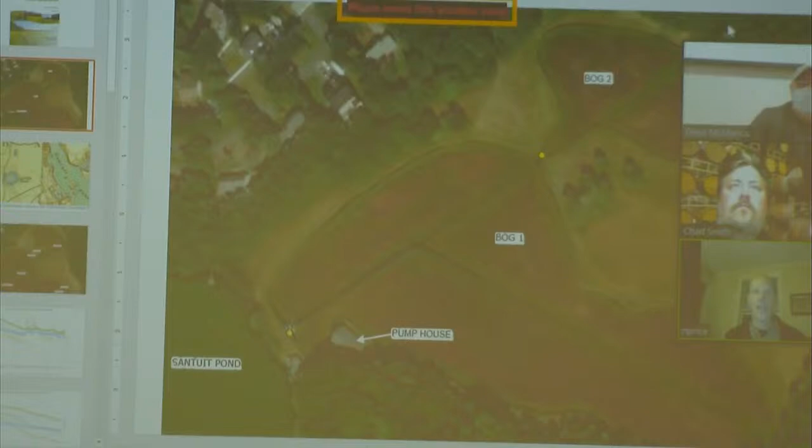You guys obviously know where this is, right off the Santuit Pond. Two bog cells, one larger than the other. Pump house and an old screening house there. Two culverts connecting one to the pond and the two bogs together.

Looking at some old pictures, the left is the 1893 USGS map with no bog shown, and the right is 1941 where the bogs are present, telling us that the bogs were built sometime between 1893 and 1941. I heard today from Caitlin that Mark Robinson from the Cape Cod Compact had looked up some deeds and thought that they were built like, I believe, 1903 perhaps. So we had been thinking they were like 80 years old, but apparently they're more like 120 years old. So they've been there for some time.

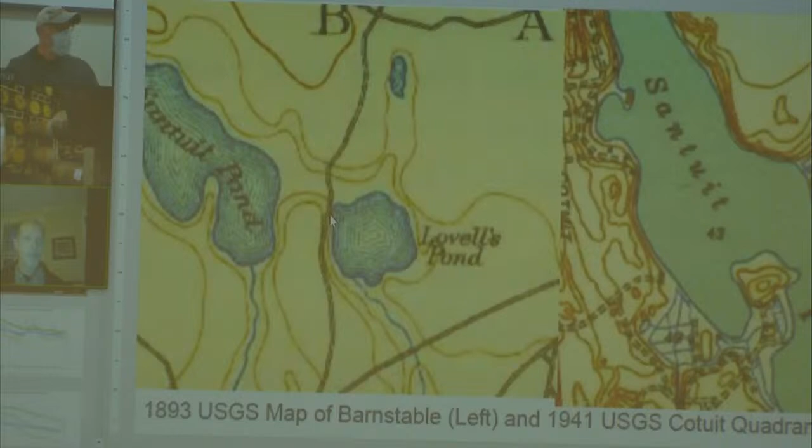This project is a feasibility study to figure out how doable it would be to restore these bogs to wetlands that were there before. What might be the right approach, and how much it might cost.

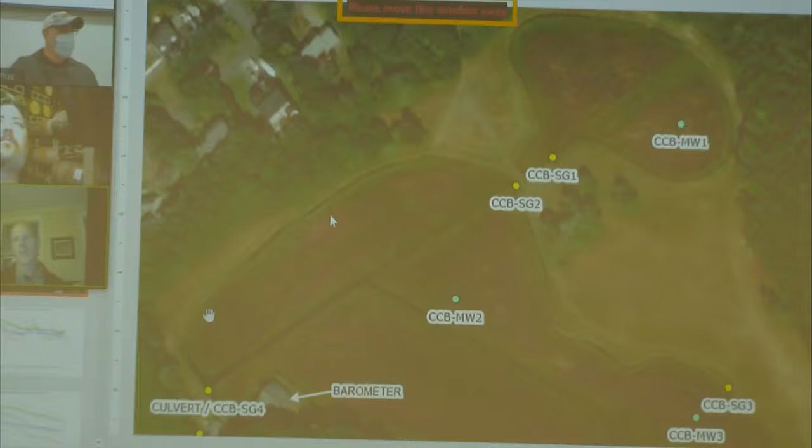And really, whenever you're looking at cranberry bog restoration, the primary considerations are how much sand is on the top, where is the peat, how thick is it, and what's the groundwater like. Because you obviously need to get the bog surface down close enough to the water table to provide wetland hydrology. And the issue with cranberry bogs is over, in this case, 100 plus years of adding sand periodically to them, the surface elevation has been raised well above the water table. So you need to get down to close to that water table elevation to support wetland hydrology. And how far you have to go dictates how much it costs to remove that material.

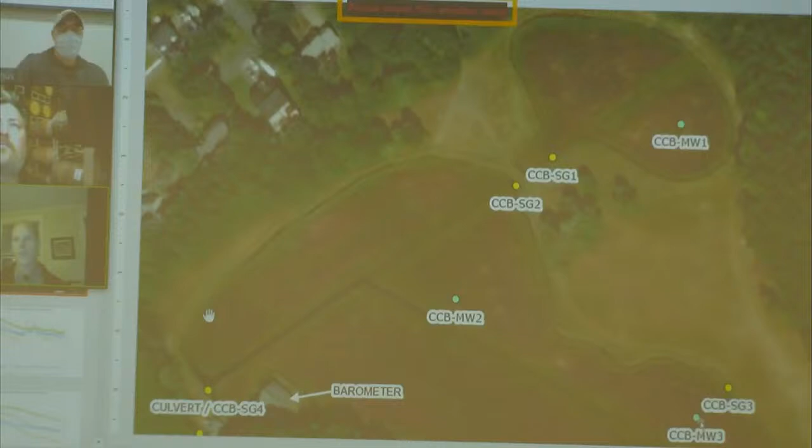So we'll start with the water level gathering. We installed 3 wells, labeled 1, 2, and 3 on this figure. Can everyone see my cursor, by the way? Yes, okay, great. And also out here in the pond, another stilling well. So those 4 spots, the 3 wells and the pond, had automated water level data loggers installed in them. So we're collecting data on a 1-hour interval in those, so we get very accurate long-term high-frequency data from those.

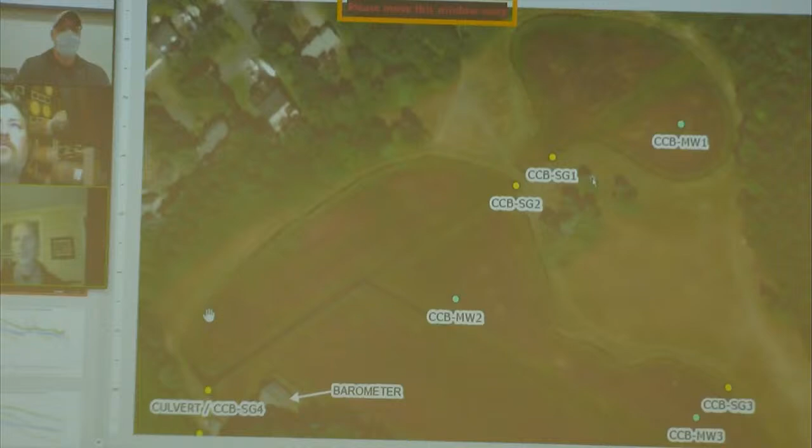We also put in 4 staff gauges in the ditches in the bogs, and those did not have data loggers. So those only had 3 distinct measurements when we were out in the field at them.

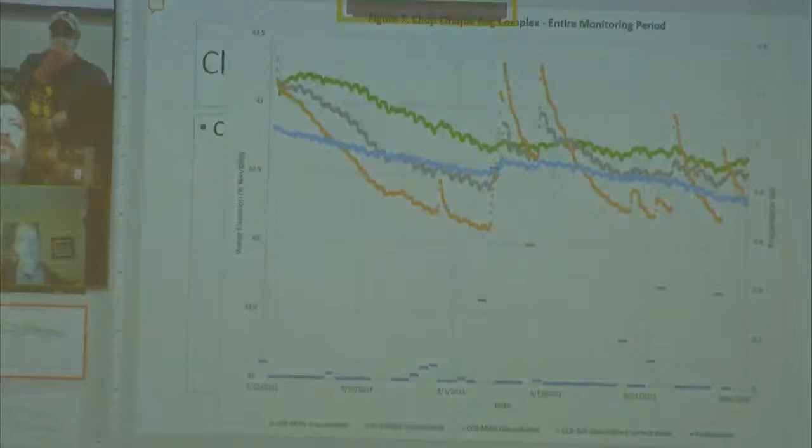This graph is showing the water levels from the 3 wells and the pond logger, so the 4 places with the fast data loggers in them, showing how water levels fluctuated over the study period from July 12th through August 31st. There's a few interesting things here.

First off, it was very dry at the beginning of the period. There were about 2 weeks where it hardly rained at all, and over that time period you can see the water levels falling in each of the wells and also falling in the pond, but falling faster in the wells.

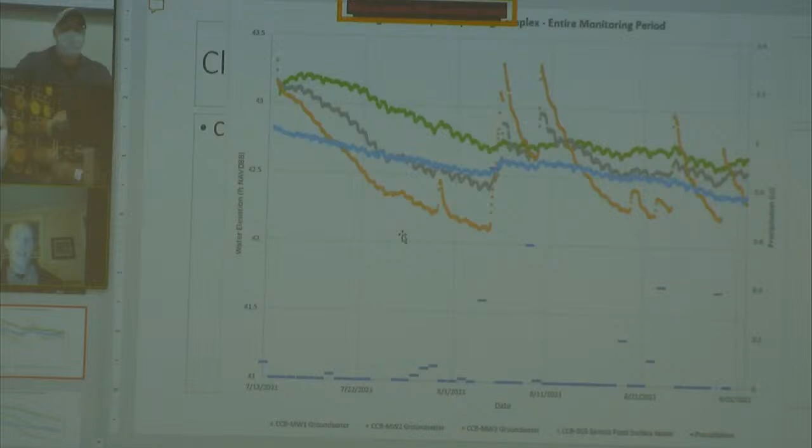I believe that's due to the fact that all of the vegetation in those bogs, the wetland vegetation, is actively transpiring water from the ground to the atmosphere. So that combination of evaporation and transpiration in the bogs is a greater loss than the sole loss from evaporation in the pond. Thus you have a faster decline.

This is consistent with standard water budget thinking for how groundwater recharge occurs. So wetlands generally have zero groundwater recharge, whereas ponds do have a small amount of recharge. So this trend makes sense with that general thinking.

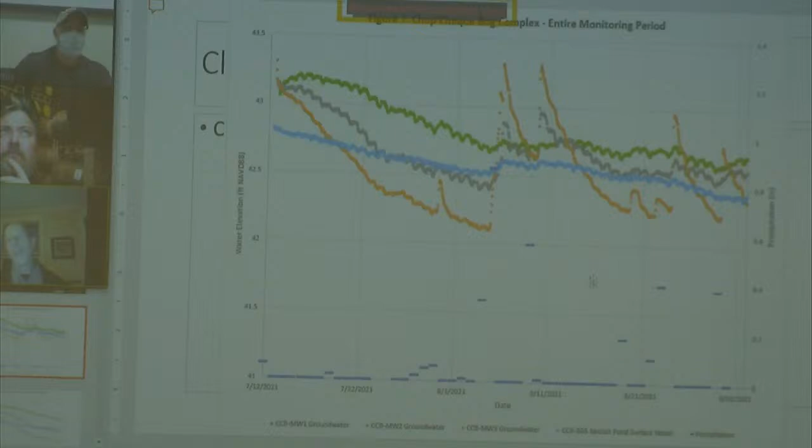Then things get interesting when it starts to rain. Each of these little blue dashes is a rain event, and the right axis gets used for looking at the precip. This was really one storm, but it crossed over the midnight time barrier, so it shows up as 2 separate items here.

You combine this, 0.8 something and 0.3 something together, and you end up with about 1.2 inches of rain in that storm. That kind of barely bumped the pond, probably by about 1.2 inches, or perhaps a little bit more from runoff coming into it.

Whereas 2, and 1 in particular, of the cranberry bog wells dramatically rose in water level in response to these events. The same thing happens again in response to this rain event, it happens here. In response to this rain event, it happens here.

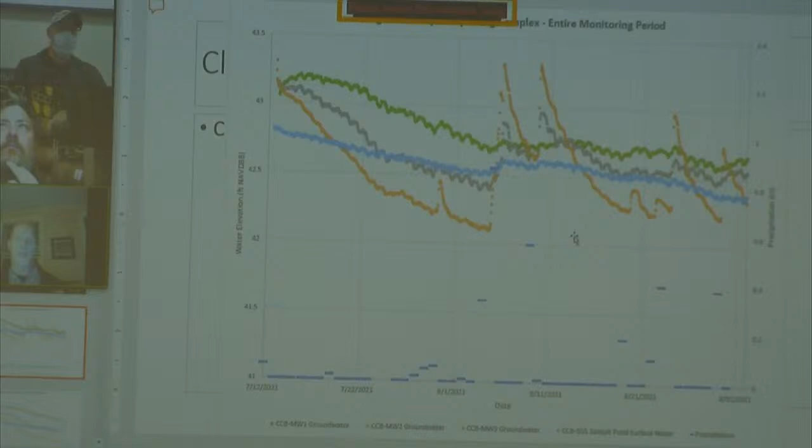So we think what's going on is that rain is hitting the bog surface. They're kind of installed in low spots, so some runoff is going towards the wells. And because of that peat layer where these wells are screened, the water has a real hard time getting out of the well once it gets into it.

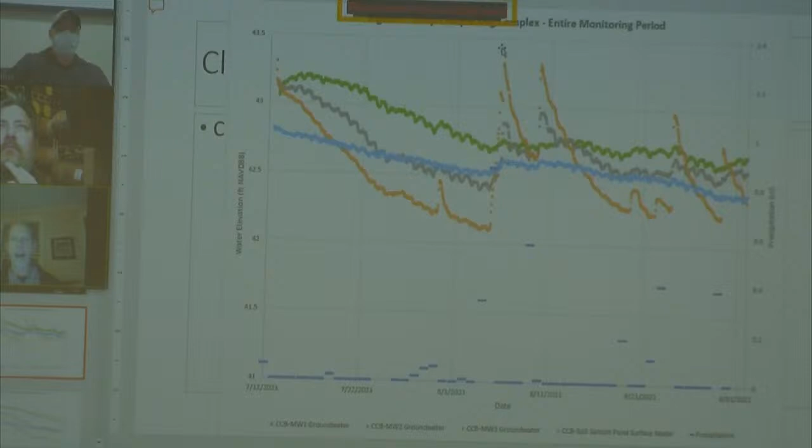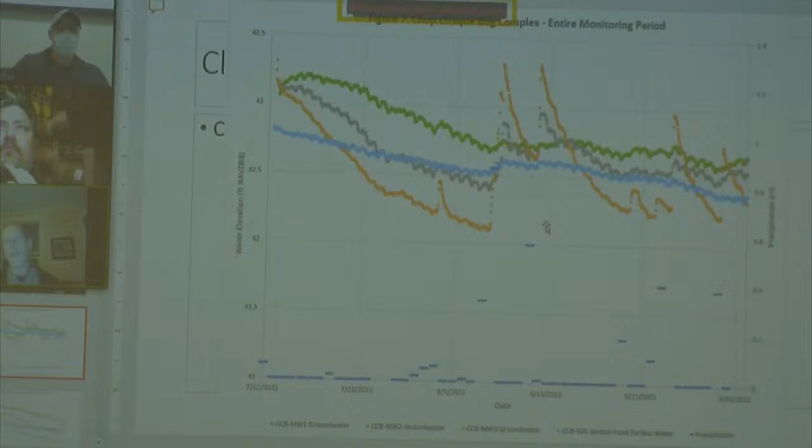So this looks like surface water runoff getting into the well, creating this rise, and then it slowly decays away in the days following the rain event. This makes it a little hard to look at what's probably really going on in the groundwater when it's raining, so we isolated that period in July when it didn't rain to get a better feel for the real groundwater situation, which is shown here.

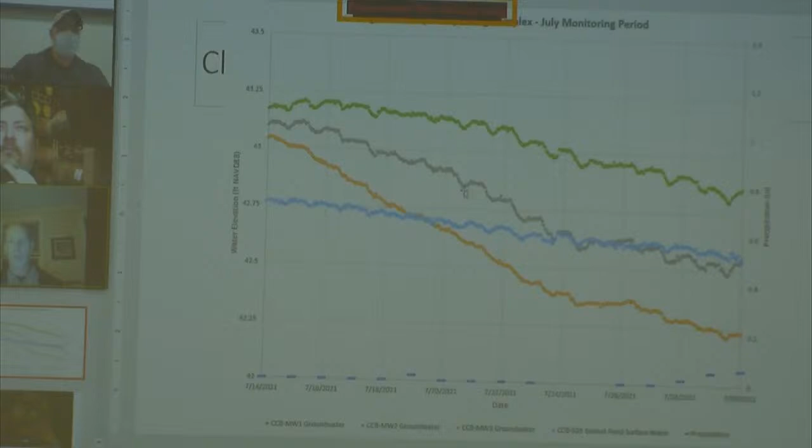Then we picked one of the days that we were out there collecting actual field data, so that we could use not just the automated data loggers but also the staff gauges. We looked at the elevations at that time and mapped a water table contour map for the area.

So you can see the flow from high to low. It's very flat - this is 0.2 of a foot of difference between this contour line and this contour line. So it's really flat, but there is a gradient of flow generally from the northeast to southwest, north-south, northeast, southwest.

And that's consistent - this is the Cape Cod Commission GIS groundwater contours. The 48 is here, don't worry about the values, there might be slightly different datums. The next one up, which was, I believe, the 50, is off the map to the north, but it shows a similar gradient from north to south in the area.

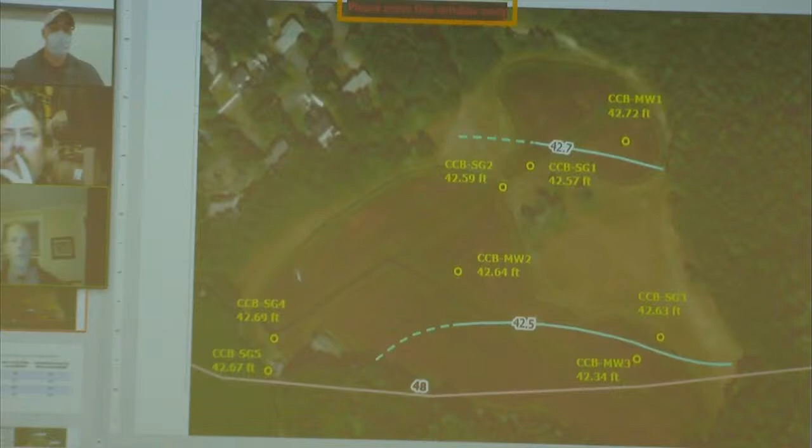So once we had this local scale information on water levels, we then went and compared it to a nearby USGS index well. This is just a little over a mile away, over off of Cotuit Road, kind of near where that rotary is. There's 40 some odd years of water level record from this index well.

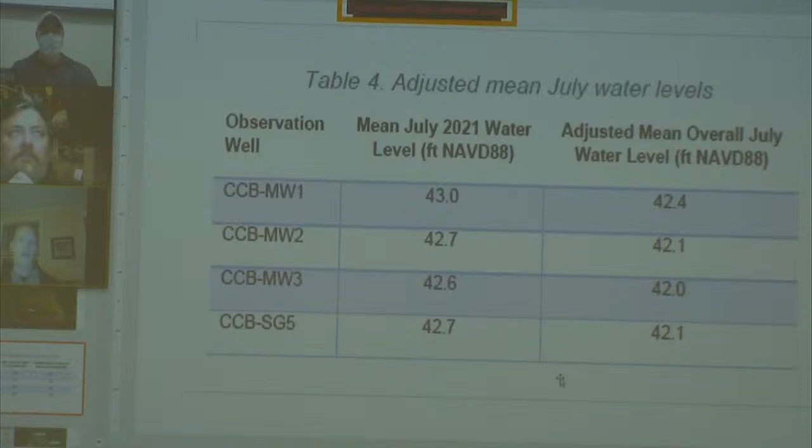By comparing our July monitoring period data from the site to this 40-year record at the index well, we could get a better feel for what we thought the overall long-term average water level conditions were. So that's shown here - it was a little wetter, water was a little higher this July than probably the long-term average conditions. So these are the adjustments that were made to compute long-term average water level conditions in the bogs for the purposes of figuring out where we need to get at for getting the surface down near the water table.

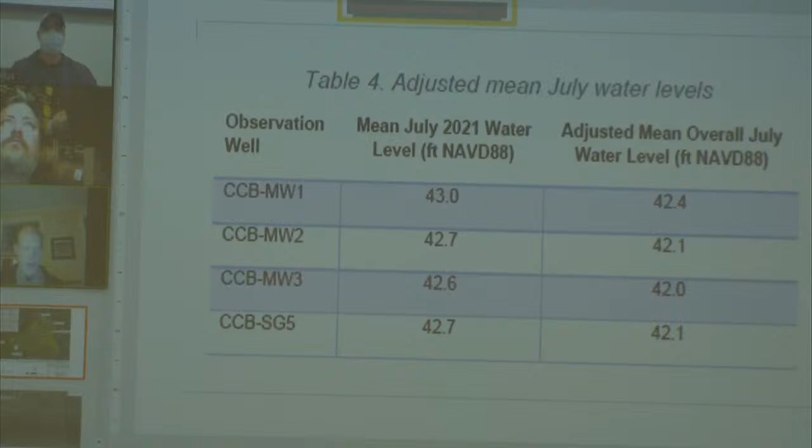Well, before I move on, any questions on the water level stuff? Nope. Okay, great. So we also did a habitat evaluation.

Again, this project was a preliminary conceptual level, basic project. So the habitat evaluation was a quick site visit, walking across in a zigzagging pattern. Our biologist recorded the species that they saw.

And grouped it into these four general communities: naturalizing cranberry bog, shallow emergent marsh, which is essentially the ditches, sandplain grassland, which is the upland habitat, and pitch pine oak forest, which occurs in a small island in the middle.

And we have areas for that, and the report documents the individual species that are shown here that are present.

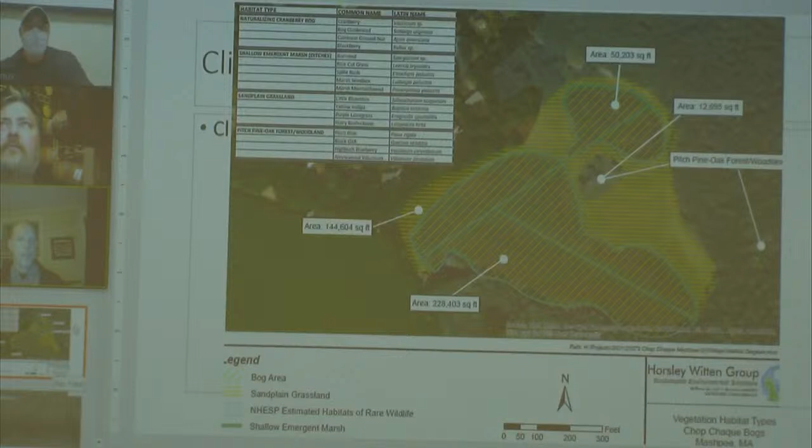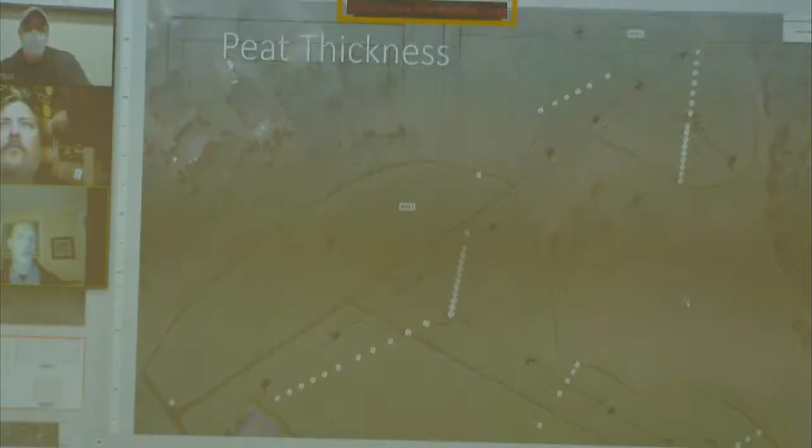So I mentioned that peat was another one of the criteria along with the overlying sand and the water table. So we also did some probings in these transects shown here, where we essentially pushed narrow fiberglass chimney rods, about 1/4 inch diameter, down through the peat until we hit the hard sand underneath it to calculate the thickness of peat.

And this contour map is showing peat thickness, with a 12-foot thickness max here, and this one's about 8, I believe, over on this side.

So this is just showing the peat that obviously developed in the wetlands over thousands of years that those wetlands existed before they were converted to cranberry bogs. So this is just indicating that these bogs were indeed natural wetlands beforehand for a long enough time to build up thick peat deposits.

So if you were able to remove that overlying sand, these bogs should be able to support wetland habitat again, and hopefully there should be a native seed bank present in this peat that will allow native wetland species to propagate once they're back exposed to the air in the right hydrologic setting again.

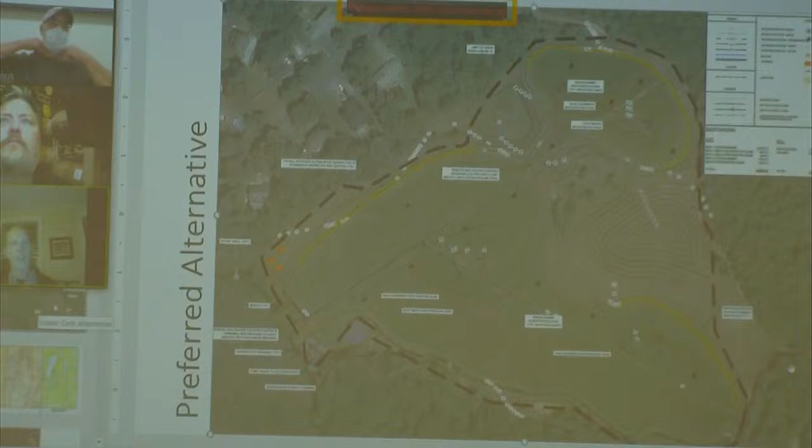The idea here would be to use a methodology that DER has been using recently on other cranberry projects called pluck and chuck, which essentially is having an excavator go out, dig some holes, and then cast the excavated material off to the side in piles within reach, so you don't have to move the material around as much. That reduces cost. The less you're moving stuff, the less it costs.

That's where this comes from, though that pit and mound topography isn't really shown here. The idea is some parts would have holes that were wet, and then there'd be mounds of stuff that would end up being high. The result of that, of course, is the mounds would not be wetland. They would be up above the water table, and the hydrology would not be supportive of wetland vegetation.

So you end up with less area of wetland restoration, less varied wetland types, but the cost of this is likely somewhere in the $300,000 to $500,000 range, getting you down below the threshold of where available funding exists.

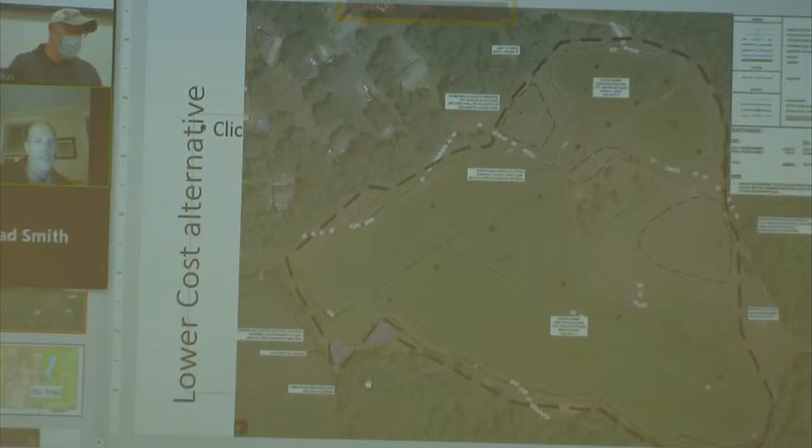So let's move on to the Quashnet. Let me start by offering my apologies to the commission, the same apologies I've given to Drew a couple of times already. We have been slower on this project than I or anyone would like for a lot of reasons, many of the same reasons that we've just been talking about with how the world has gone with the pandemic and staffing, et cetera. But we are doing our best to catch up, and so let me go through where we're at and where we're going on this.

Similar to what I showed for Chag, I like to look at old maps to show how sites have changed over time, as an indicator of how long, for example, cranberry bogs have been here. In the 1890s, this upper Quashnet area is shown as a wetland, with the Quashnet River exiting Johns Pond and heading south. No cranberry bogs present in the 1890s.

Unfortunately there's always a big gap. In New England, the general time frame of available USGS maps is something in the late 1890s and then either the late 1930s or early 1940s, a 30 to 40 year gap of available mapping. That's unfortunate, but that's just reality.

By the time the 1940s come around, all of these bogs have been built. This is the more recent 1990s map where you can see the bogs here. So we're probably talking something in a similar time frame to what we discussed with Chag, probably in the vicinity of 100 years, plus or minus, that those bogs have been in existence.

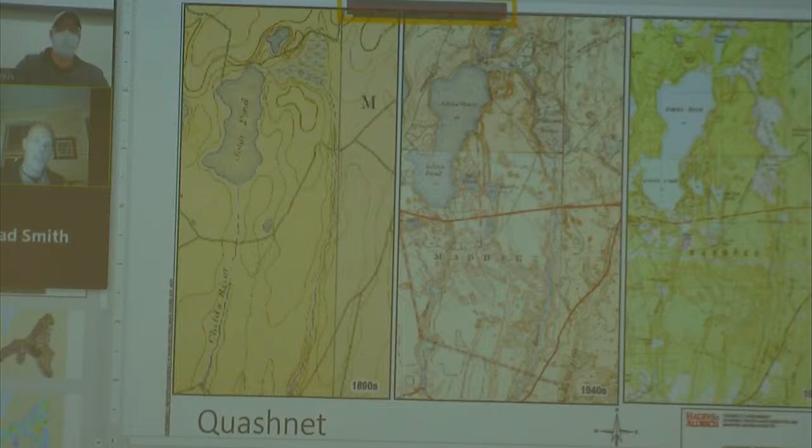Just to refresh people on the site, this triangle of wetland area is now this general triangle of bog area.

This photo is from a good amount of time ago, probably before 2010, when it still looks like cranberry bog. Now, if anyone's been out there, it's rapidly being reclaimed by various habitat types, with a lot of pitch pines and other trees and shrubs going on out there now.

The available funding for this project, and one of the main reasons we're doing this, is that a berm the Air Force built to help separate the river from potential contamination plumes failed, and because of that failure, this money has become available to pursue restoration of these bogs. The reason I mention that is not just because it's a source of funding, but the reason for the failure is the very soft sediments that exist in this central portion of the site.

Trying to walk around and do survey out in this area, as we've done recently, you can easily lose a person if you're not careful. So one of the things we're thinking about in the restoration concept is to not do too much earthwork in this super soft area in the middle of the site, where things don't seem particularly stable. We'll come back to that a bit later.

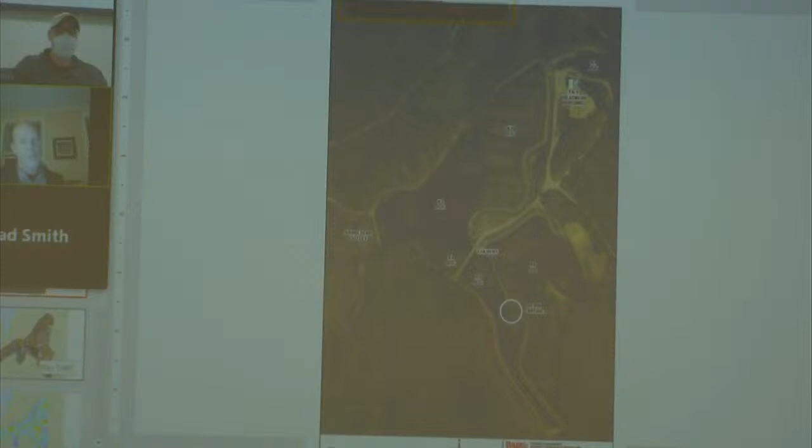Immediately before COVID, one of the first things we did was have the site flown with drones collecting all sorts of really cool information. This picture shows a high resolution visual frequency image of the site, where you can see individual trees, the water, the berms, the roads, and buildings. This was taken in January with a little light snow on the ground, so the sand pits are popping up white, creating a nice relief. We've used this as our base map for a lot of the design thinking going forward.

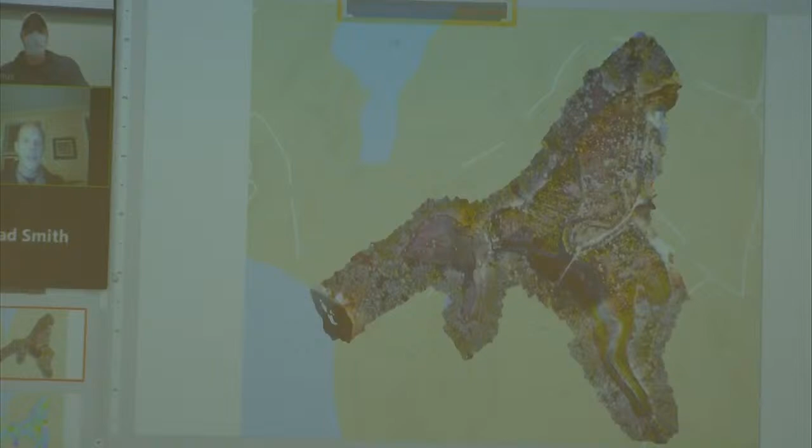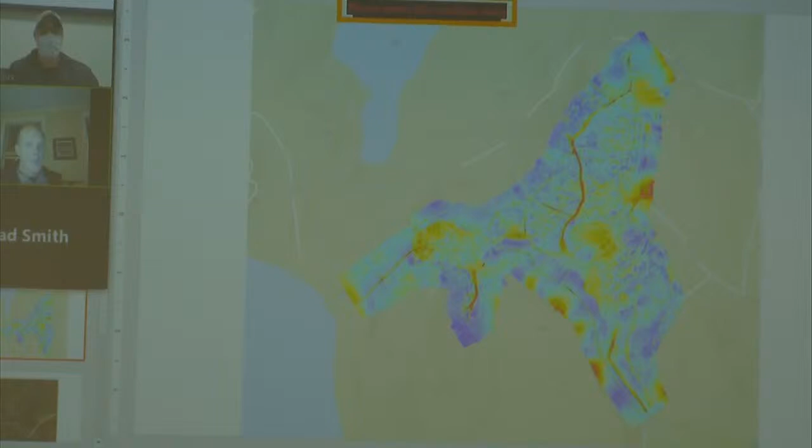Another key element, as I mentioned with Chop Chag, is the peat. The NRCS went out with ground penetrating radar, rather than doing the whole probing process we did by brute force at Chop Chag, to essentially look into the subsurface and map where peat was thick.

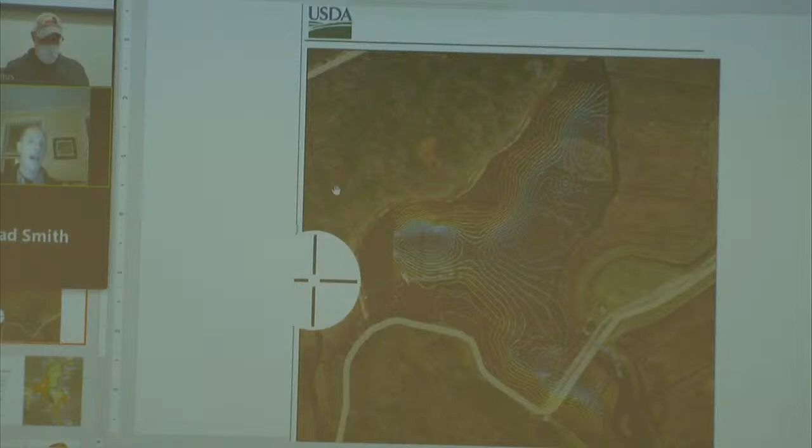You'll see later we're trying to balance being near the peat with not wanting to do a lot of earthwork in the really soft areas. Our current thinking is not to always put the stream straight through the thick peat, but to have the stream nearby and let the thick peat area be restored wetland, as opposed to direct stream channel.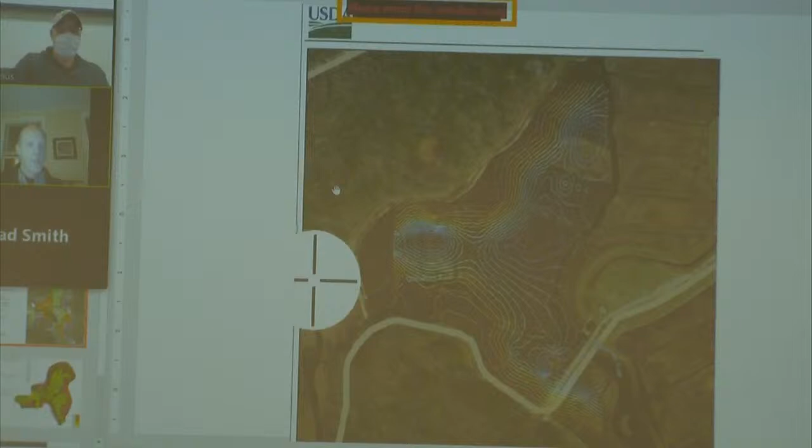This summer we were out—let me back up. I talked about the visual imagery and thermal imagery the drone was able to shoot. The third very cool and important thing was the drone-shot LiDAR topography.

LiDAR stands for light detection and ranging. This has become common practice in about the last dozen years. USGS and other government agencies do it by airplane. In Massachusetts we're fortunate—we're one of the few states with high-resolution LiDAR topography data for the entire coastal area.

This drone-based LiDAR is a bit finer resolution at the site scale because the drone flies much lower than the airplanes used for regional-scale LiDAR mapping. But one shortcoming of LiDAR is that the laser shot down from above, by plane or drone, does not penetrate the water surface. So it does a good job of getting high resolution topography for land, but not a good job showing the bathymetry under the water.

We do need that for restoration design. So we went out a bunch of days this past spring and summer and conducted topographic field survey in the river and in the ditches. We didn't get absolutely every foot of every ditch or river channel, but we got a lot of it—both transects going across and profiles running up and down it.

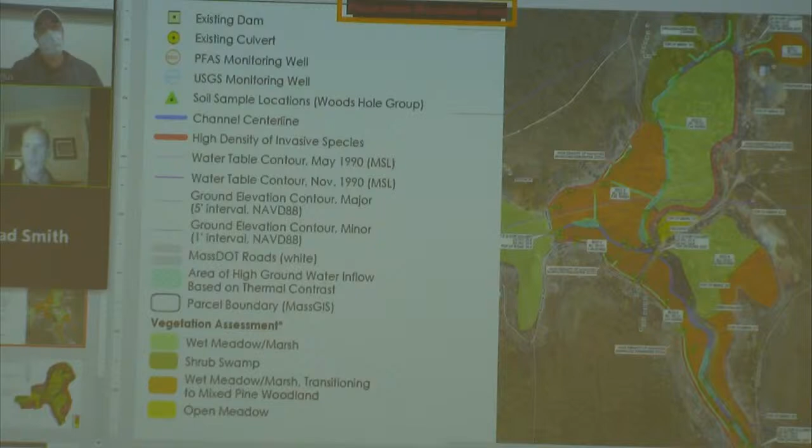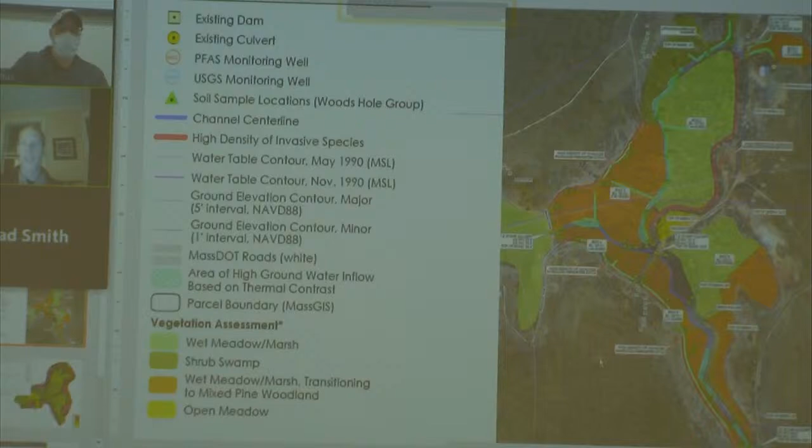We have a list of all the species found. The red shows areas of intensive invasive species presence as observed in the field. That's the culmination of the field base map existing conditions mapping done to date.

So in order to understand and design a river channel, you need to understand the flows, both the velocity and the elevations of the water, which gets done in a model built by the U.S. Army Corps of Engineers called HEC-RAS, essentially a cross-sectional model. Each of these black lines in this plan view are cross-sectional transects that went into the model, made based on our field survey combined with the drone LiDAR survey.

And this is an example of one of those in the model shown here. This is a cross-section across the river, showing the variation of the bog surface on either side, and then the actual river channel in the middle. The blue is where the water is in this particular simulation.

So HECRAS essentially takes whatever hydrology, whether storm events or certain exceedance durations, and sends it from one cross-section to the next. The height and velocity of the water experienced at any transect is dictated by the cross-sectional geometry that water is being forced to go through. So you can use this to predict how high the water will be at a certain spot under a certain condition, and how fast it will be flowing.

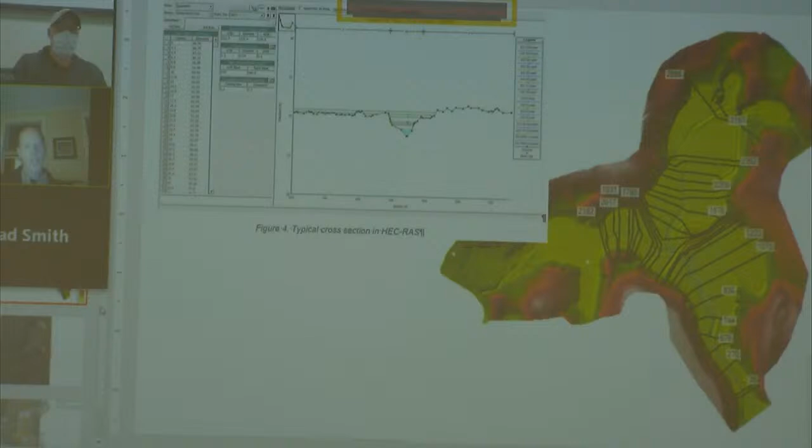This is a rough back-of-the-napkin sketch, close enough to a napkin, of what he and I were thinking about for potential restoration design options before any of the work I just went through. It shows two branches of the river coming together, keeping the main flow and the work away from the soft area, using this cold water area—which we didn't know at the time was cold, but now know is cold—in the shade posed by this high hillside, to put the main river channel along. The black is trying to limit the earthwork to keep costs down for the main area.

We might be rethinking that depending on money and all that, but trying to take advantage of those peat deposits, we might want to expand that somewhat.

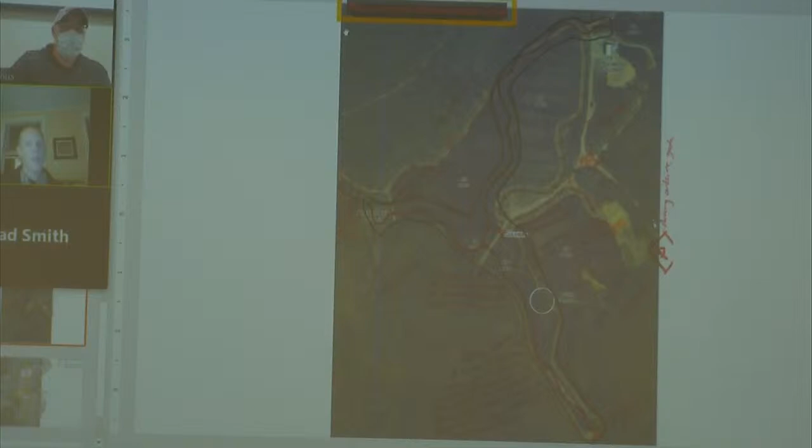I'm just showing this because it's interesting that this is our working concept design in a much better looking image that takes all of the data we've gathered, the base mapping, and the modeling done to date, to show a preliminary concept of how this restoration might work.

In this case, we've actually done some math to compute the meander bends for the hydrology and topography of the site, and placed them trying to minimize the amount of work that needs to be done, trying to utilize those existing channels that have cold water and aren't terribly overly straightened, and then only deviate from those where it looks necessary to either get into cold water or to avoid doing work in really wet, soft material.

So the green is the existing stream system, and the black is the draft conceptual proposed stream system—similar, but with some slight movements. Yellow are the existing berms. This brown shaded area represents areas of the thickest peat shown from the ground penetrating radar, with the idea being to target those for primary wetlands restoration.

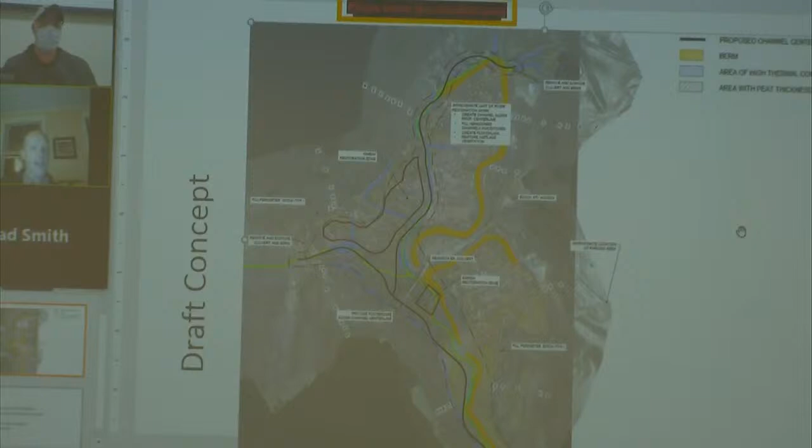Next steps are to refine the hydrology input. We feel pretty good about the cross-sectional geometry we've made, but there's a lot of work to be done—a lot of options for how you define how much water to put into the system, especially because this is such a groundwater-dominated system. We're working with USGS, which has been gathering stream flow there, but their station has only been out for a few months, so there's not a lot of data yet. We're trying to correlate that small data set with other downstream, longer data sets to get a better idea of the range of hydrology to run through this model.

Then we're going to refine the design alternatives and discuss it further with all of you. Ultimately, our scope of work includes public outreach—we have two phases. We're in the closing stretches of the first phase now, which will culminate with the town and project partners selecting a preferred alternative. It will then go to public outreach.

If everyone agrees with that, then in phase 2, that selected alternative gets advanced further to the 50% design level, which would be suitable for permitting. And once we get to that 50% design, that's the end of our current contracted work, and then it would move on next to actually do permitting. Then, as we talked about, do final design, construction bidding, and construction after that.

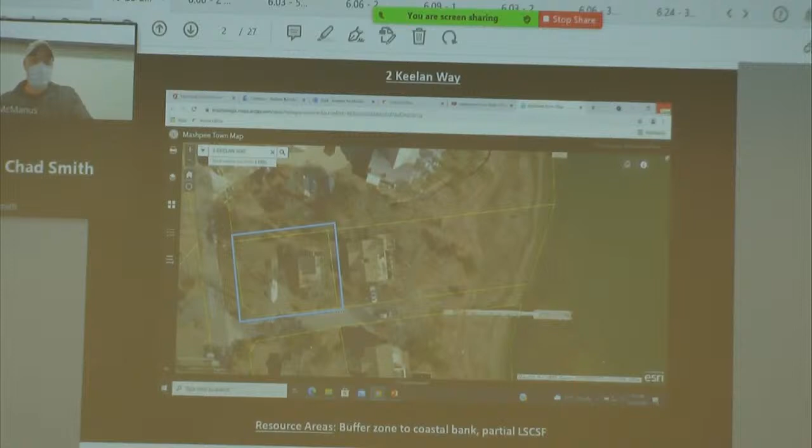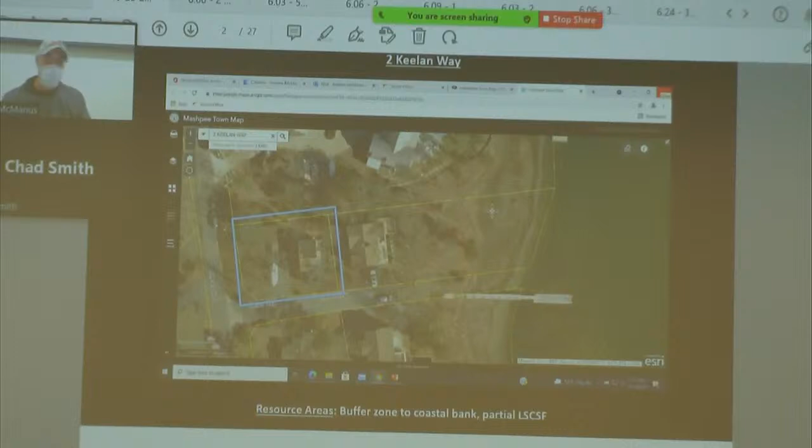Thank you, Mr. Chairman. For the record, Matt Costa, Cape and Islands Engineering, representing the applicant. Mr. and Mrs. Keelan are here tonight in the audience as well. We're here tonight under a notice of intent application to raise and rebuild an existing structure. You can see Drew has it pulled up on the screen. That's the...

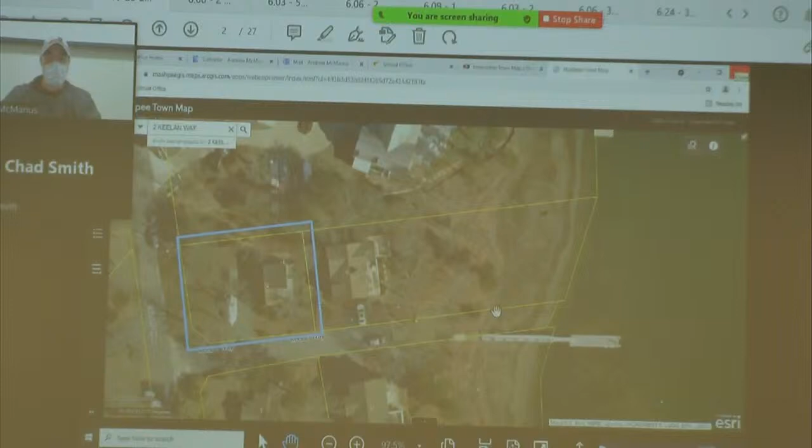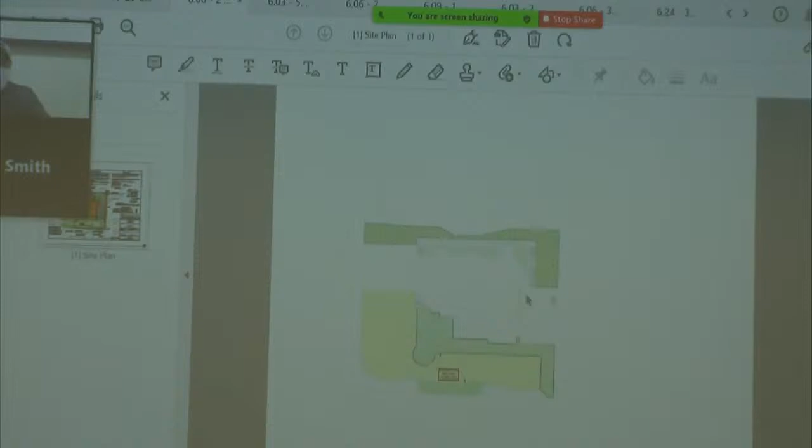GIS assessor's map, and you can see highlighted in blue is the parcel. It fronts on shore at the corner of Keelan Way, a private way. It's separated by another structure, dwelling number 4 Keelan Way, from the adjacent wetland areas. The wetland resource areas for this project include a coastal bank and land subject to coastal storm flowage. The coastal bank is off-site and located adjacent to the dwelling at number 4 Keelan Way.

Here Drew has the site plan pulled up, and we're showing in brown the footprint of the new dwelling. You can see in the dashed line underneath, which he's outlined, the footprint of the existing dwelling. And you can see in blue to the right of that screen, the coastal bank, based on slope criteria in relation to the flood zone. You can see in the lighter blue line, the flood zone line just comes onto the property.

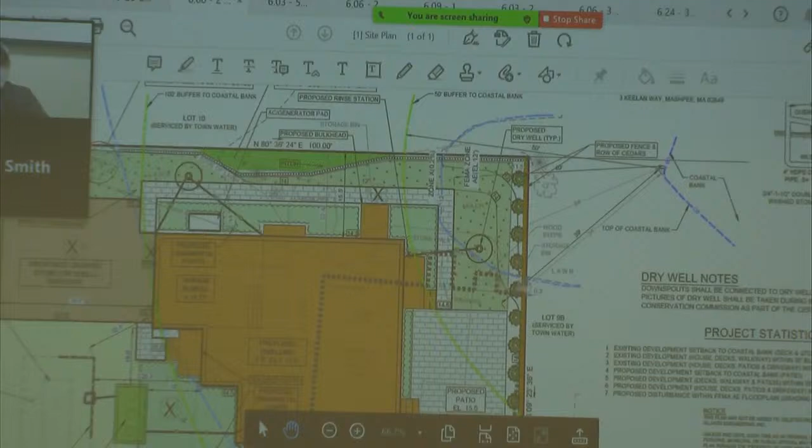The buffer to the coastal bank is all legally previously disturbed. The entire site is developed as a single-family residential lot. There is no work proposed in any naturally vegetated buffer areas. We're effectively relocating the house further from the coastal bank here.

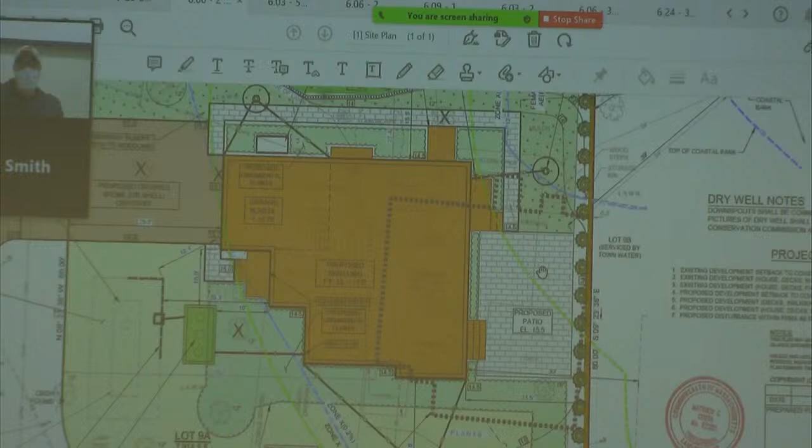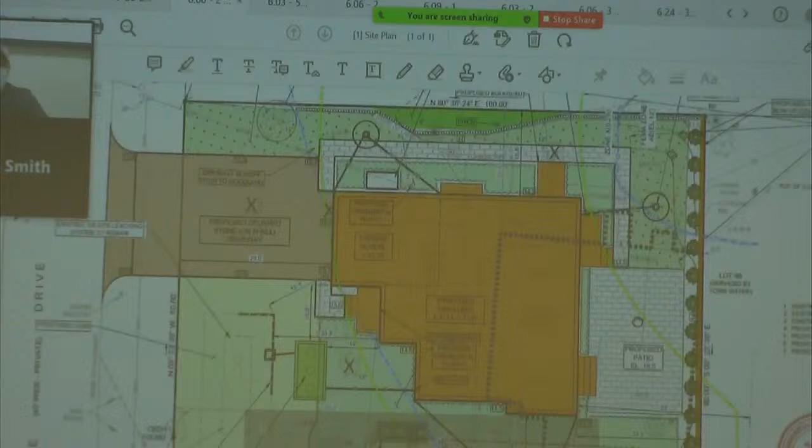This plan does show the areas where we intend to mulch and provide lawn. The lawn, of course, will be in accordance with Mashpee's lawn standards. There is an existing septic system on the site, a Title V leach field, which we are proposing to connect to by way of installing a new septic tank shown in green in the front of the house. It's a very straightforward project. It meets all the applicable performance standards, and we're requesting you issue an order of conditions.

Drew did pull up some pictures here, and you can just see the current conditions of the site, the existing dwelling, existing landscaping. And with that, I'll be happy to answer any questions.

Drew, comment? Sure, so just showing the commissioners some of the photos of the existing site. Again, this is a private road, Keelan Way in New Seabury. And there's the existing home. So this area here, you can see some of the staking for the footprint of the house to be rebuilt, with the existing house in the background. Most of this property is previously altered in landscaping and hardscaping, with existing lawn. Just another image here, this is the back side of the house facing the other house to the east of it, the existing house, and I think there's another photo here.

So yeah, this is the existing home. Here's the other home that borders the coastal bank and wetland resource areas.

Going back to the plan, these are the resource areas on the site. You've got land subject to coastal storm flowage delineated by this blue line, and coastal bank, likely man-made, delineated here. The two green dashed lines show the 50 and 100-foot setbacks to that coastal bank, and the flood zone is shown right here.

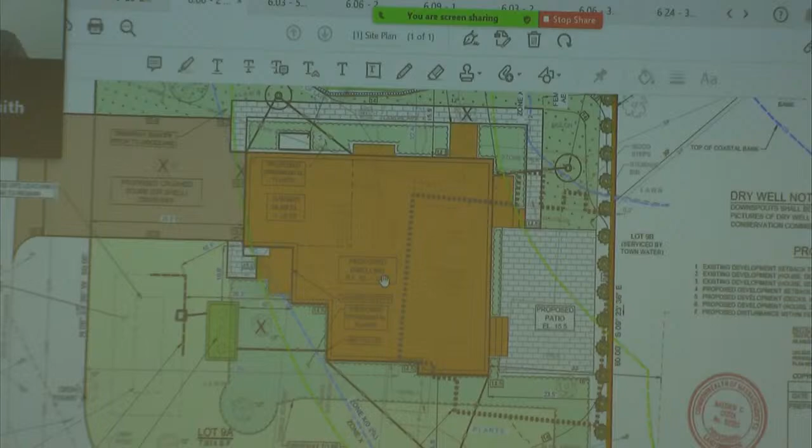Obviously the coastal bank is not a sediment source, it's just a landform coastal bank. I would recommend to close the issue. The reason I had this recommended to be submitted as a notice of intent is because I believe projects, even if they are this far from a resource area, given the scope and scale of a typical tear-down and rebuild scenario, should be conditioned for runoff control, sediment containment on site, and everything that goes along with construction activities on this scale. Also, the lawn should be conditioned to meet local lawn standards once the site is stabilized and revegetated.

So is there no other comments on this?

I'll read into the record the building and Board of Health comments. Building commented that this project was sent to ZBA for several reasons, and since it is a corner lot, there is no hardship. In their opinion, the excess lot coverage and encroachment of the deck into the 50-foot coastal bank buffer can be easily avoided. They do not consider a ground level patio a structure and leave that determination to the Conservation Department. Board of Health commented that the property is in a Zone 2 and is restricted to the existing 3 bedrooms with a conventional system. Septic design plan and floor plan to be reviewed upon submission to Health and Building Departments respectively.

Thank you. Questions, comments from the commissioner? There don't appear to be any questions from the commission. Questions from the audience or anyone who's called in? Nobody's called in on the line, and no questions from the audience.

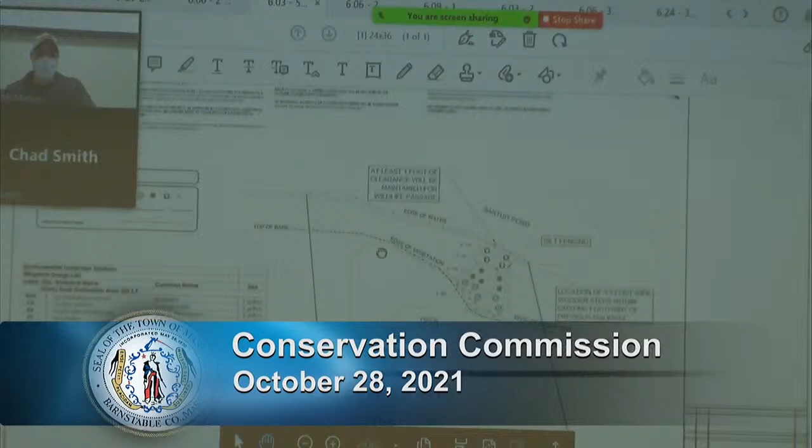Give you some history of the property. It was built in the 1960s by my dad, my grandfather, and my uncle. My father was a lineman, so his idea was to put in a series of telephone poles because the hill was so steep, and then attach a boardwalk that you would go down in levels, then a staircase to the pond. That was in 1960. Over time, because of increased water levels in the pond every spring, the bottom telephone poles at the edge of the water became very rotten from being underwater most of the time. I believe it was one of the bad storms in 2017.

We've had a lot of issues as a result of that. The water level fluctuates, people have lost their docks. We lost our walkway and our dock. Every time we raise a dock up, the next season when the water comes back in, we lose the dock. But that's a different issue.

We're here today because we cannot access the lake. We're within the same footprint of the original boardwalk, and there are several pictures that I've attached to the RDA. I don't know if you have them. They have them in front of them. Okay, great.

Because of the condition of the original boardwalk, it became a danger. But we're within the same footprint, and I have a drawing of what the staircase will look like. There'll be 3 platforms: one at the top of the staircase, one halfway down, and one at the bottom of the staircase. I just received this from my contractor, so I apologize for not providing it to the commission earlier. It's a much simpler staircase. We're looking for basically simple, stupid.

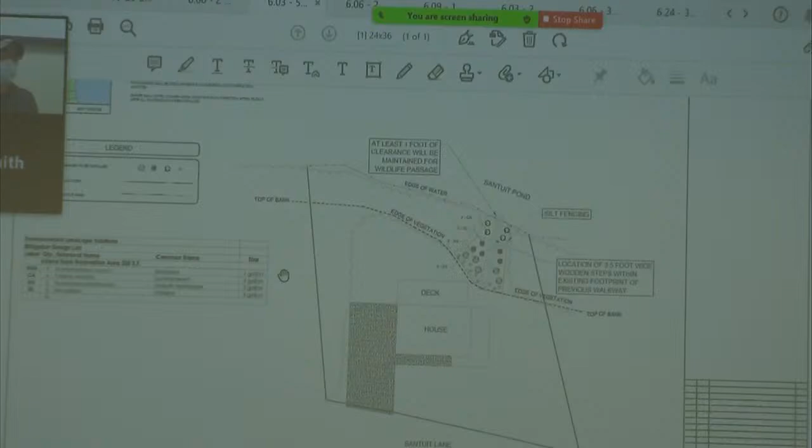We're not looking to do anything with telephone poles or a fancy boardwalk, but we do need your permission to go forward with the project. We will be mitigating with bushes on each side of the staircase to mitigate the erosion. At this point in time, one of our neighbors told us that people were on the property, even though there's erosion control, going down to the lake down the hill. So we're in a serious situation where a trespasser could, even in this condition, be injured.

So we'd like to get back to work.

Hey Chad, you want me to offer up anything? Yeah, Drew, would you like to offer any comments? Sure.

Most of the project has been explained by the applicant. The way this came about is work had begun on replacing the stairway. There's no question about the need to replace the stairway. It's just that jurisdiction was not known - the homeowner was not aware of the type of jurisdiction associated with this property, which is inland bank. You can see on the plan where it delineates top of bank. It's a fairly steep bank, probably anywhere from a 4-to-1 to 3-to-1 slope, and maybe even 2-to-1 as you get down towards the bottom of the bank.

Where it meets the shoreline, the pre-existing stairway, as you can see in photos in their packet, had been seriously dilapidated. But it had been since removed when our department was made aware of the work, and new construction of a stairway had already begun at that time. As a result, we put a cease work order on it and informed the homeowner that they had to go through this process to effectively retroactively permit. Since that time, the property owner was also informed that they had to go to the building department to make sure the new stairway meets building code.

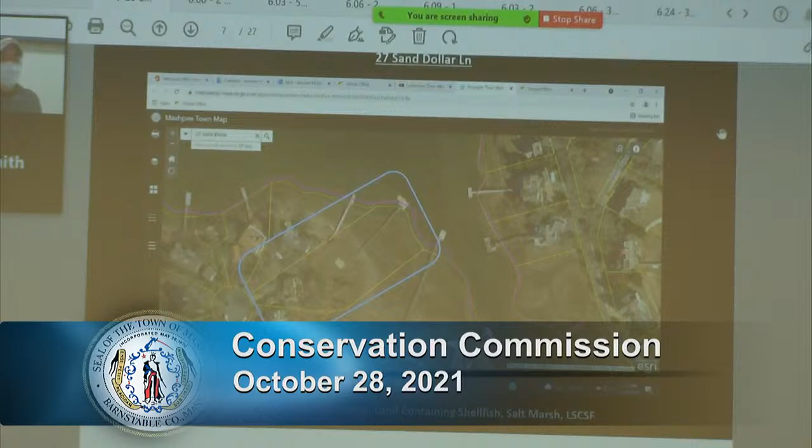Hearing for Alex Kesselman, trustee, the 27 Sand Dollar Lane nominee trust, 27 Sand Dollar Lane. Proposed relocation and expansion of existing pier, ramp, and float. Representative is Cape and Islands Engineering. This is an NOI.

Thank you, Mr. Chairman. Again, Matt Costa, Cape and Islands Engineering, representing the applicant. We're here tonight under a notice of intent application to rebuild the existing dock.

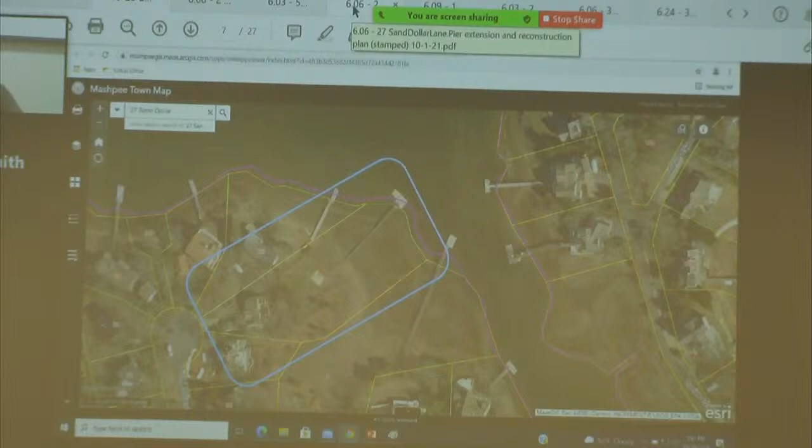Drew has it pulled up on the screen. You can see circled in blue, the existing site has an existing dock now with a square float at the end, and then a jet ski float attached to that. You can see surrounding docks in the area, and it's right at the entrance to a little dead-end waterway off of Ockway Bay.

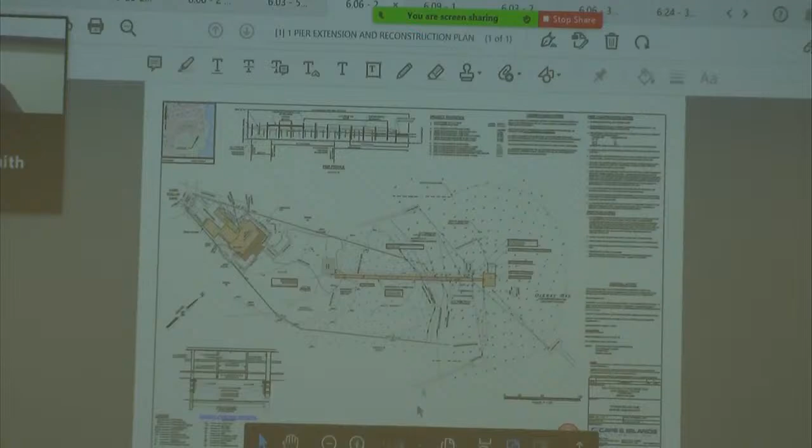The existing dock is old style construction where they would build the boardwalk very close to the salt marsh. We're proposing to remove that entire structure and rebuild a new structure to current design standards. It will be elevated above the marsh, have through-flow decking, and provide the adequate 5-foot clearance near mean high water for fishing and fowling access.

If you look closely at your plan, you can see the end of the existing float, which is not shaded. The proposed float is all shaded in brown. The existing float end is where Drew's identifying it on the plan. You can see the soundings around that float - those represent depths at mean low water, and there's very, very little water there.

We're proposing, as part of this rebuild, to push that float out, keeping the same float size and ramp size. We're going to extend the fixed pier a little further into the waterway to gain some additional depth around that float. This project has been reviewed by the Harbormaster

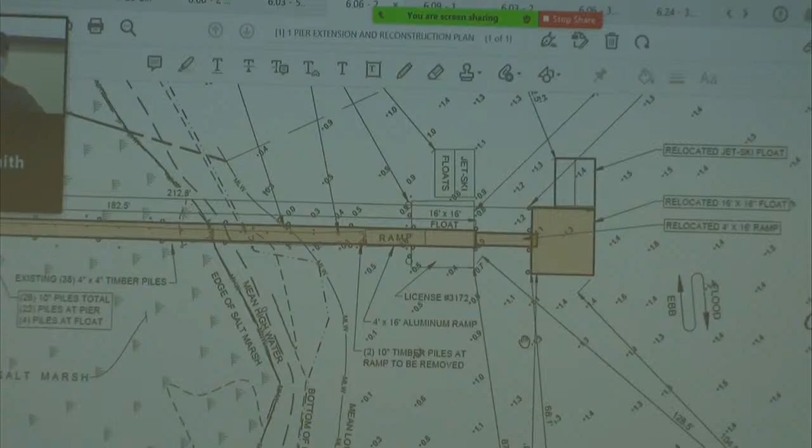and by the Shellfish Constable - the Shellfish Warden. The Shellfish Warden has recommended shellfish mitigation for this project because we are expanding this pier, and we agree with that. I did jump ahead a little bit. So your resource areas for this project include land under the ocean, land containing shellfish, the salt marsh, and land subject to coastal storm flowage.

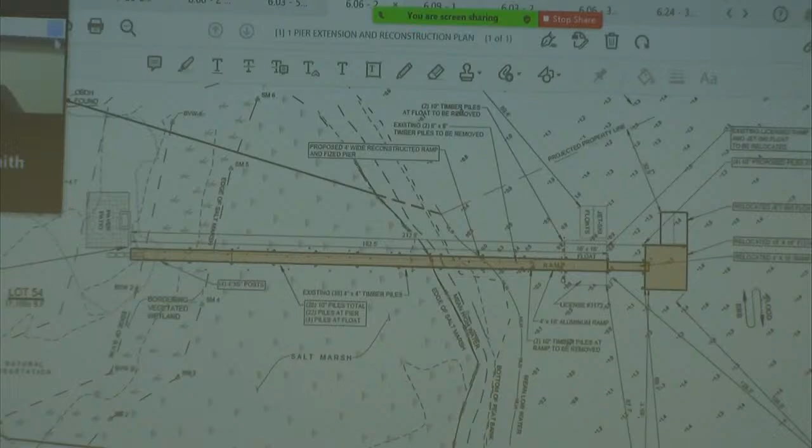This project will result in a net environmental benefit, and we do believe it meets the performance standards as articulated in our narrative. We respectfully request you issue an order of conditions. I'll be happy to answer any questions.

Thank you, Matt. Drew, commentary? Yeah, I'm just going to go back to the PowerPoint for a moment, just to show you some images of the site.

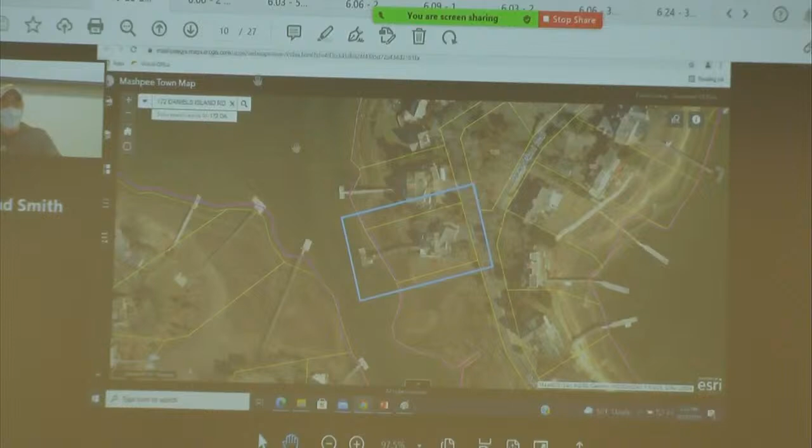Good evening, folks. In front of you, you can see my home highlighted in blue, and coincidentally it's just opposite the one we just reviewed. In the top right-hand corner of the lot there's an existing pre-disturbed vegetated area, with maybe 2 or 3 native inkberry bushes, and the rest are non-native plants.

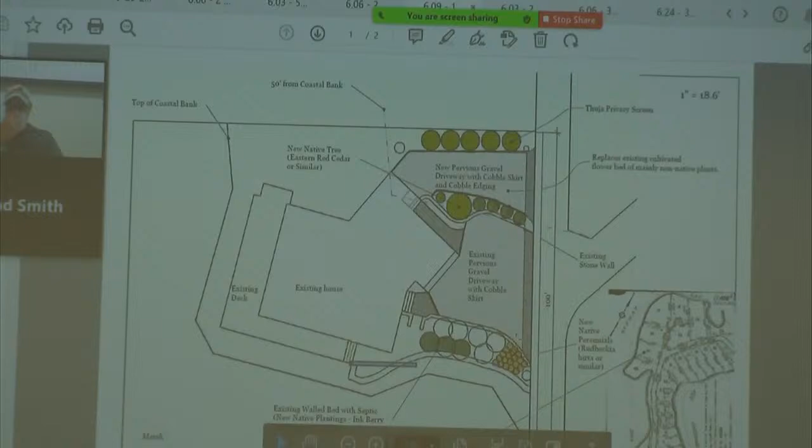The proposed plan is to place a permeable or pervious driveway with a cobbled edge, as shown in the drawing, by removing the existing vegetation and revegetating on either side of the driveway—one on top to provide a screen, and one on the bottom to provide a break between the upper and lower driveway areas.

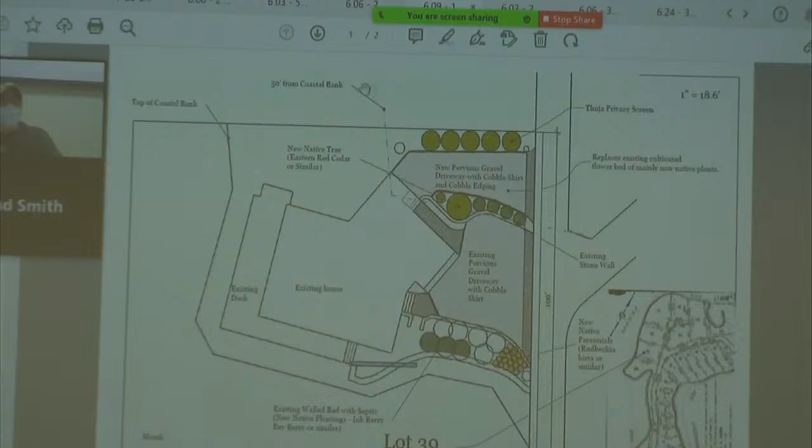If you look at the map, you'll see a dashed line marked 50 feet from the coastal bank, and the proposed new driveway area is within the 50 to 100-foot zone. Some of the existing vegetation, the 2 or 3 inkberry bushes currently in the bed, we'd like to relocate to the lower bed closer to the coastal bank. That's another pre-disturbed area with existing vegetation, and the goal in the lower bed is to plant more native plants as part of mitigation for this work.

It's currently full of non-native plantings. I think that's about it.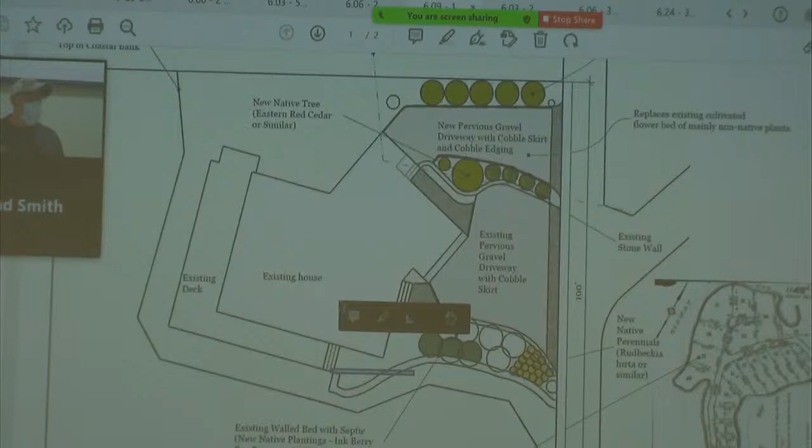Thank you. Drew, your comment? Pretty straightforward application, not too much to add. As the homeowner mentioned, the project is contained within the 50 to 100-foot setback to the top of coastal bank, in an area that's essentially an existing landscape bed with some native material and mostly ornamental material, which the native material he has offered to either transplant or replace in other areas around the property. The driveway is to be of a pervious nature, and there is no impact, as you can see, from the location of the coastal bank, which again is a vertical landform coastal bank.

It is not a sediment source bank associated with salt marsh, so its primary function is as a vertical buffer to storm damage, and no part of this project will interrupt that performance standard or function. So I recommend a negative determination.

Thank you, Drew. Questions and comments from the commissioner? Drew, do you have any pictures of the home? Oh yes, sorry.

Hearing none, any other questions and comments from the audience or anyone who called in? Just going over some photos first, Chad. Oh, sorry about that, no worries.

Top left here is the image of the existing home and existing driveway. This is the area on the top right where the proposed parking lot is. Here are some of the inkberry shrubs, and then you've got a variety of ornamentals. So it's a pretty disturbed landscape condition in this buffer zone area of the coastal bank. Looking at the opposite side of the property, just beyond the retaining wall is the existing driveway, and there you can see the garage.

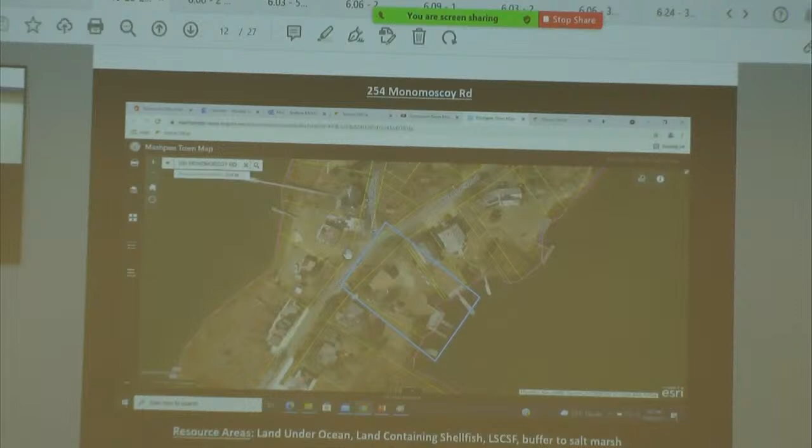Drew has the site pulled up on the screen. It's located on Monomoscoy Road. The resource areas for the site include land under the ocean, land containing shellfish, and land subject to coastal storm flowage.

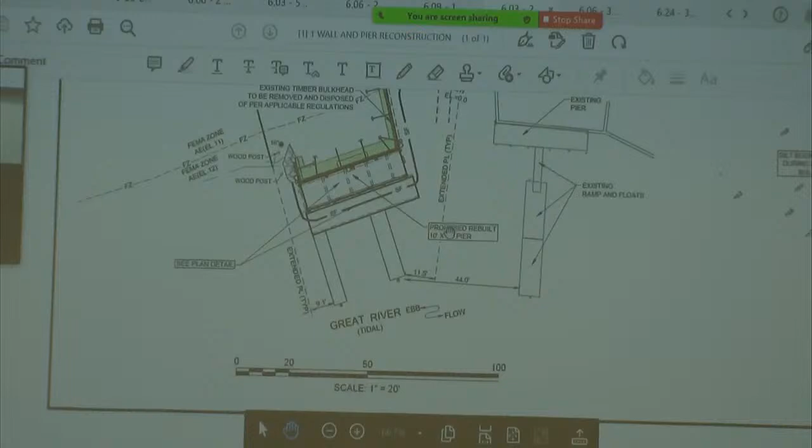The existing site has right now a recently licensed fixed pier, bulkhead, and float system. You can see there are 3 floats: 1 long float next to the fixed pier, and then 2 finger floats extending out.

We're proposing to rebuild the fixed pier portion, the 10x40 pier, and rebuild the existing bulkhead. The bulkhead will be replaced with a vinyl sheet pile style bulkhead with the appropriate tiebacks. There will be some new pilings installed, and old piles replaced with new piles for the existing fixed pier.

There will be some disturbance with this activity, and the area behind the bulkhead will be replanted in accordance with Mashpee's lawn standards, more specifically with some salt-tolerant grasses, because this is a very low site and it can have a tendency to get inundated during storm surges.

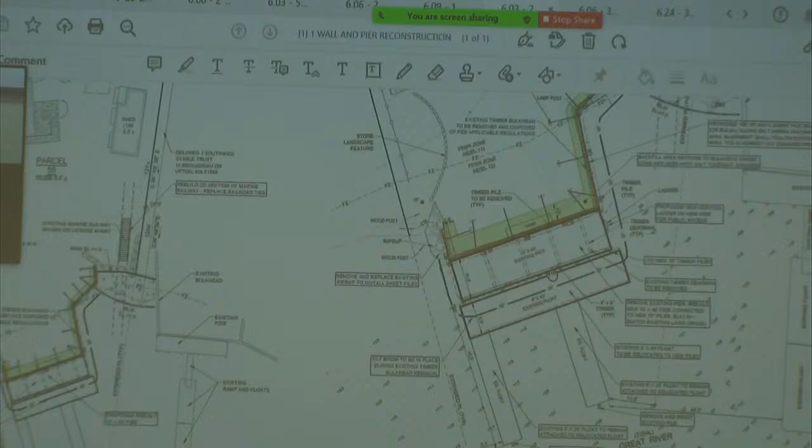Also, as part of this project—very unique to this site, and there are actually 2 other sites on Monomoscoy Road with similar features—there's a marine railway. This is a licensed structure dating back prior to the 50s. It isn't in current use, but he wants to maintain the rights for that railway, and it is deteriorating on the upland side. As part of this application, we're proposing to rebuild a portion of that railway in the upland area. No work is being proposed in the salt marsh or below mean high water with regard to the railway.

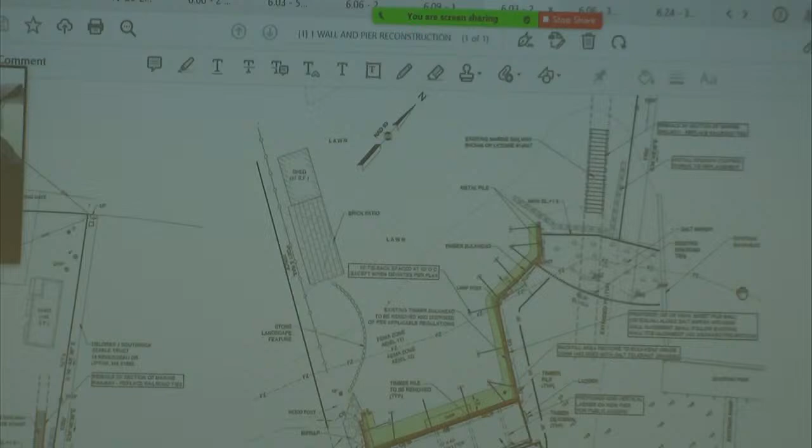The rebuilding of the dock and the existing bulkhead does meet all the applicable performance standards as we have outlined in our narrative. We've had this project reviewed by the Harbormaster and by the Shellfish Constable. The Harbormaster had a favorable review. Shellfish did recommend shellfish mitigation for this project.

We disagree with that. We have spent some time recently discussing shellfish mitigation with Drew and Caitlin. We've drafted a methodology that we hope someday would get discussed and finalized and published so that other consultants and applicants, property owners in general, can have an idea of what they're dealing with regard to shellfish mitigation.

The regulation cited for the mitigation of the piers is Reg 3, Part A, 9, Section P, and that specifically states that when an applicant seeks to construct a new dock, or enlarge an existing dock, it goes on to explain that the commission has the rights to require mitigation.

We're rebuilding an existing licensed structure here. We are not enlarging it in any way. We feel that shellfish mitigation is an undue burden to the applicant because they are not asking for anything outside what they legally have now. We open that up to discussion and would enjoy some feedback on that. Barring that, we do request that you issue an order of conditions. I'd be happy to answer any questions.

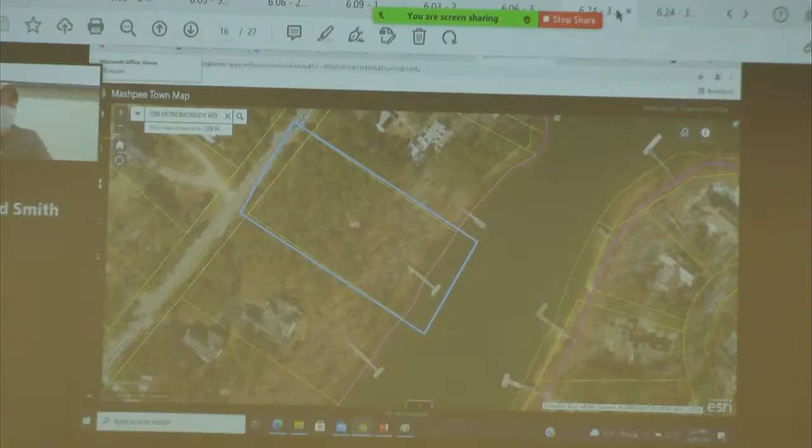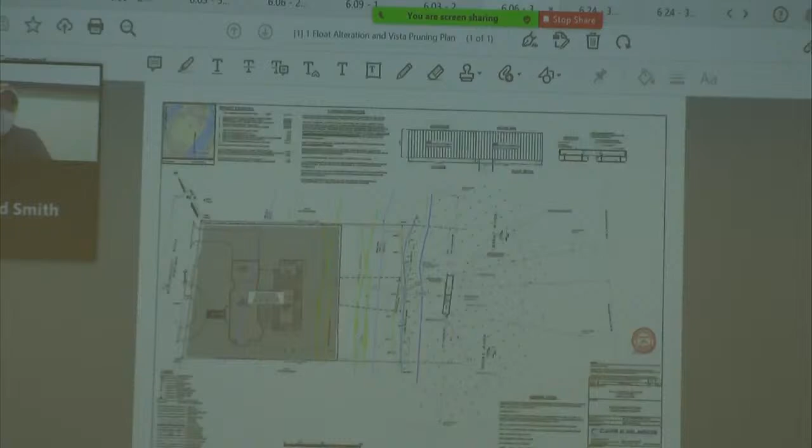Your resource areas for this project include land under the ocean, land containing shellfish, salt marsh, bordering vegetated wetland, and land subject to coastal storm flowage. We have an existing licensed pier, Drew has the plan pulled up on the screen. We're here proposing to remove the existing float and replace it with two 18 by 24 floats, and to relocate the two pilings.

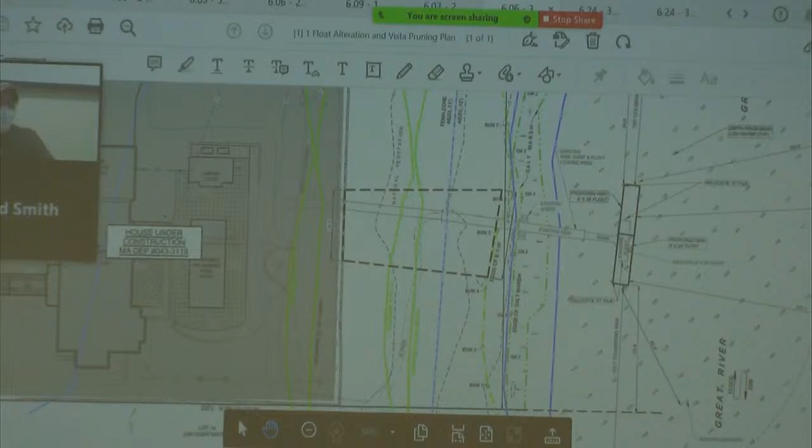Also part of this application is the permitting of a Vista corridor, that's the black dash trapezoid shown on the screen. That does meet your regulations for Vista corridors and the rather convoluted formula of frontage, then a percentage of the frontage, then 80% of that used for the back line. That's how you end up with that trapezoid.

But the project, including the trapezoid and the pier, does meet the performance standards, and we are requesting that you issue an order of conditions. Again, this project was reviewed favorably by the Harbormaster and was reviewed by Shellfish. Shellfish did make a recommendation for mitigation, which we agree with and accept. With that, I'm happy to answer questions.

Thank you, Matt. Drew, commentary? The only comment I have on this...

is in regards to the Vista pruning. I have no issue with the corridor. It was calculated out as per our regulations, Regulation 29, buffer zones and buffer strips. The commission may recall, not all members, but this lot was subdivided. It was one lot at one time.

And I did make this known to Matt in my comments about the existing pathway associated with the Vista pruning from the property next door before it was subdivided. I don't see it on the plan, not a big deal, but I'll just make my recommendations known when it comes to the Vista pruning as a condition of approval.

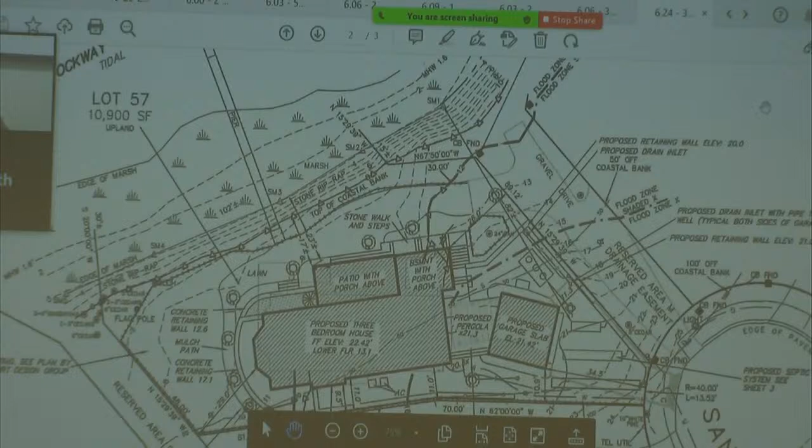Andrew Garrelay has drawn up the Yarmouth Port Design Group plan. If you have that on there, there's much more native shrub habitat, or shrub and tree habitat, than existing. So maybe Andrew can talk about that part for you.

Before we get into that, just want to separate the two out in case the commissioners have any questions on what you just presented. Before we get into the landscaping, an opportunity for questions on what Tom just presented. If there are any questions. If not, we can move on to mitigation. I'm good.

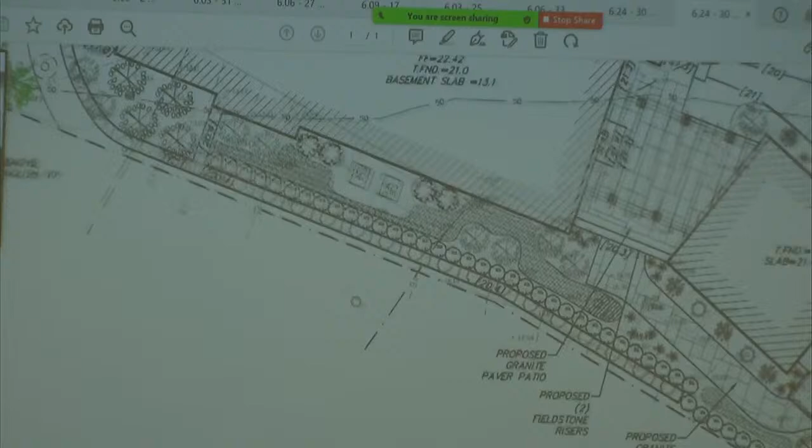The property does slope down as you go down the hill along the face of that wall, so that at the highest point where the wall drops, if you move the hand a little more to the left where the contour number 14 is, right there, see the wall is at 20 feet above sea level there. The ground next to it on your property is elevation 14, so the wall will appear to be 6 feet high right there. Then it drops down to elevation 17.1, I think, just to the left where the elevation is 13. You can move your hand to the left, see where it says 13? Right there, the wall is at elevation 17, so the wall is going to be 4 feet high right there.

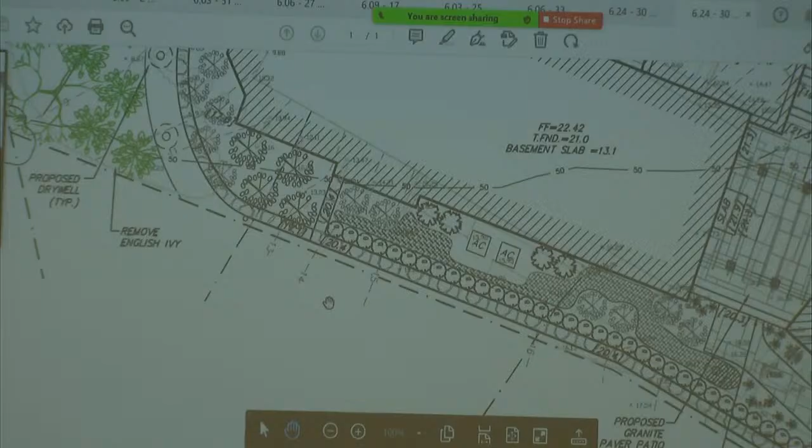What do you need a wall 6 feet high for in one location? Because we have to get the average grade around the perimeter of the house to be, on average, no more than 6 feet below the first floor, or the basement becomes the first floor and the house becomes a 3-story house. It's a zoning rule forcing us to put the wall around and fill in between. Then the wall is going to stick up a little bit above the grade everywhere between the house and the wall, so no water runoff is going to go over the wall onto the abutting property. So you won't have additional runoff going onto your property.

So sir, can I just ask you, because I'm not very knowledgeable in this, to be honest, so where it said on the... Yes, in that location. So your property slopes downward, the top of the wall is going to stay level.

So your property is like this, the top of the wall is like that. When you get all the way to the left end of the house, the wall's gonna be 6 feet high there, but back toward the garage it's actually gonna meet the existing ground. Where their deck is now, the part of the house that looks down to the water, I saw it said 17 feet, 4 feet, and 20 feet.

Is that going to be about 4 feet, that wall? Yeah, at the left side the wall gets to be 6 feet high, just a little more than 6 feet. Then the top of the wall drops down to elevation 17, where it will be 4 feet high. So when you get to the end of the house, it goes from 4 feet, and the top of the wall is gonna be level. The property keeps going down, but not a substantial amount, so the wall won't look taller as you turn that corner from the property line.

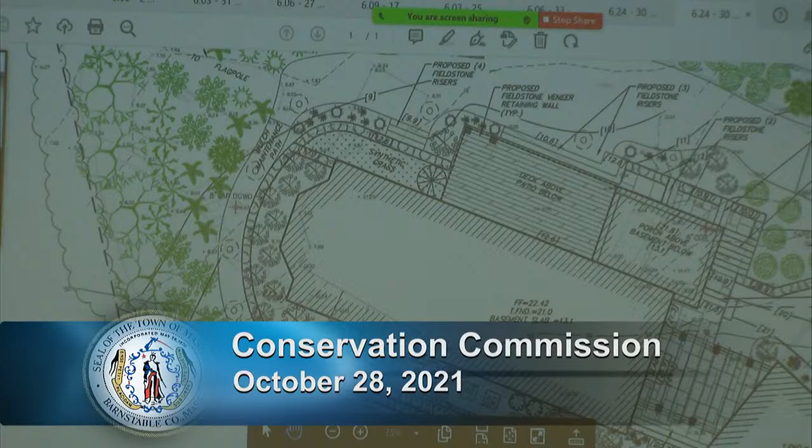I've got just a quick question, because you show the maintenance path, mulch maintenance path, and you've got dry wells here—are these dry wells, these symbols? Yep. So how does that work if you've got mulch over the path? Well, they're under the ground, so the pipes go into them under the ground.

The mulch is just— you don't think that'll interfere with the capacity for drainage at all? I'm sorry? Will that interfere with their capacity for drainage? There are covered inlets in the mulch. It's piped underground, just put under the path so it wouldn't interfere with the planting of the plants, which are outside of the path, for mitigation.

One other thing I'd point out as far as sunlight: this property is to the north of the abutting property, so whatever's done here is certainly not going to increase shade on a property which is to the south of it.

I don't see any additional comments, Chad, from the audience. Thank you, Drew. I was unable to consider much of the commentary as the speakers were not coming to the microphone and I could not hear them, so I'll defer to the commission. Are there any other questions or comments with the commission, or first with the commissioners? I don't see any. Anyone from the general public who would like to make further commentary?

Could I just say one thing? Tom Bunker has a comment: just generally to the abutters, this is going to the Board of Appeals. I don't think it's been filed yet, but it will be appearing for the Board of Appeals, where there's much more leeway for voicing concerns that are non-conservation related. And that's where they'll take up views and things like that. Yeah, it's much more under the zoning's purview, those issues. But I think drainage was a legitimate concern to have discussion on. Totally agree, appreciate that.